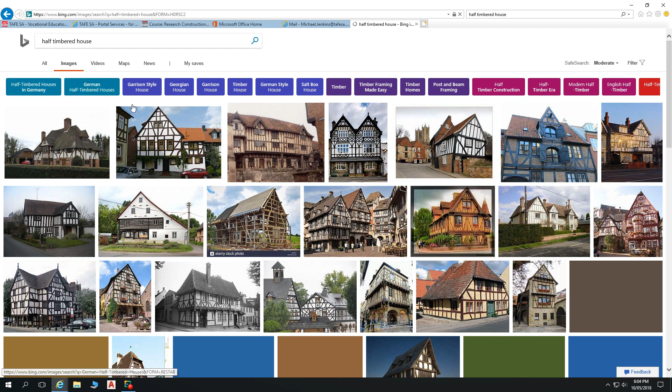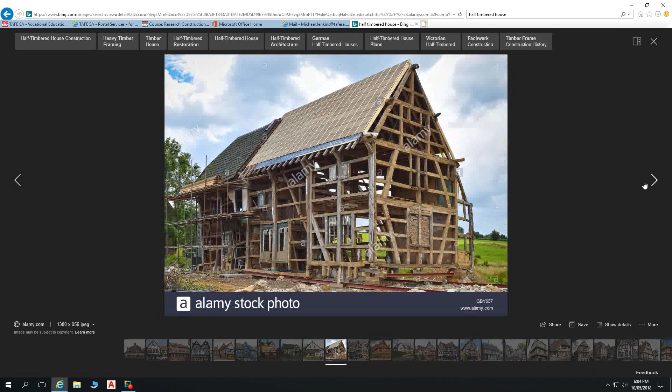I'll do a quick Bing search of an image for a half-timbered house, because I'm sure it's one of those things that when you see it, you go, oh yes, I know those. So it's that classic Bavarian looking. Yeah. Well, actually, that one there sort of shows it all without all the infill. So we actually do have a few of these in South Australia.

So that's sort of the early style of timber building, the first approaches to timber building that truly produce a modern structure. And it's about a series of uprights, a series of cross members, essentially producing portal frames like we went through a few weeks back. If we strip all this out, what we've got here is a portal frame.

What they didn't have back then is steel for making joining plates, or steel for nails. And so to get around that, they used diagonal members for bracing and strutting. So when there's a load on this way, this acts as a strut. When there's a load pushing the other way, it acts as a brace, being diagonal like that. And then some intermediate pieces here for fixing all the brick infill or stone or mud and straw, whatever they want to use. And then all these bits are dowel fixed. You've got mortise and tenon joints and dowels going through all that type of construction. So that's where our building has evolved from in that sense.

I guess you guys would have seen a lot of modern timber frames about the place. We've got upright studs, noggins, top and bottom plate tying it together, and then roofs pitched in, using rafters and under purlins, strutting beams, hanging beams, etc. Where we went on from that traditional way of pitching a roof is to produce a truss.

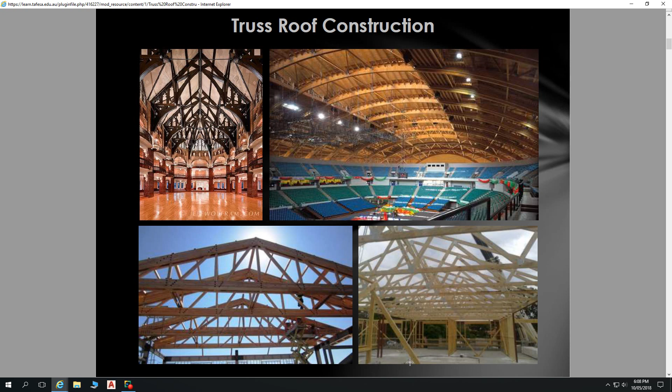So there are limitations with design in that regard, or sometimes it's easier to truss the majority of a roof and then just leave one piece for pitching on site, bits that are a bit odd or funky, that are too difficult to draw up and convey to a truss manufacturer. Although truss manufacturers are getting better at this as well, in terms of you being able to supply them with a roof and all the design information, and then they go ahead and produce trusses.

So a bit of background. Since our first attempt to enclose space for shelter, the most challenging process of building has been carrying the loads over horizontal distances without touching the ground, so spanning between two supports.

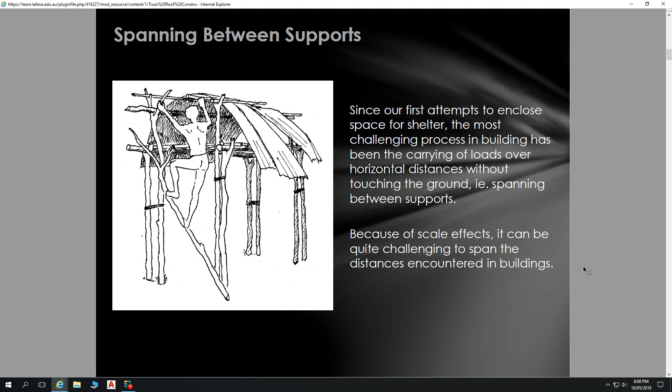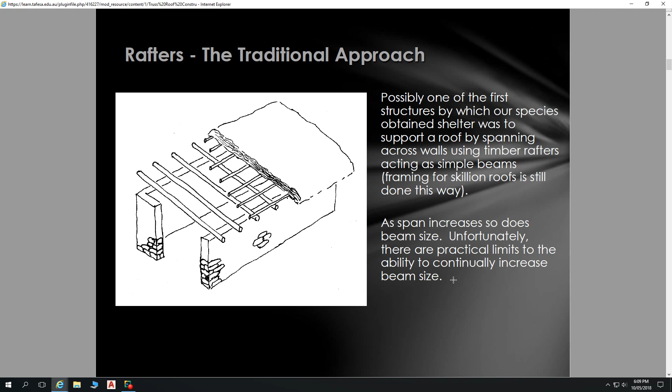So, first sort of approach doing that, simple rafters, skillion roof, and that still has its application. There's still plenty of places that use a skillion roof and long and straight rafters, and that has also, I guess, once again been extended in its possibilities via trusses as well. So not your standard A-frame trusses, but things like ladder trusses and your floor joist type trusses, which we'll have a look at a little bit later on.

So designed to span between external walls, simplifies the roof system and its construction, factory made, available and installed in accordance with AS 4440. So that's an Australian standard you probably will get to know fairly well. One golden rule with AS 4440 is that typically throughout that standard there's 50mm tolerance for things. So you're allowed 50 millimeters tolerance for placing the trusses, 50 millimeters tolerance from vertical, etc. So you notice that 50 millimeters applies through many aspects of installing trusses. Can be designed for most roof shapes, preferred for simple designs, rectangular with gable ends.

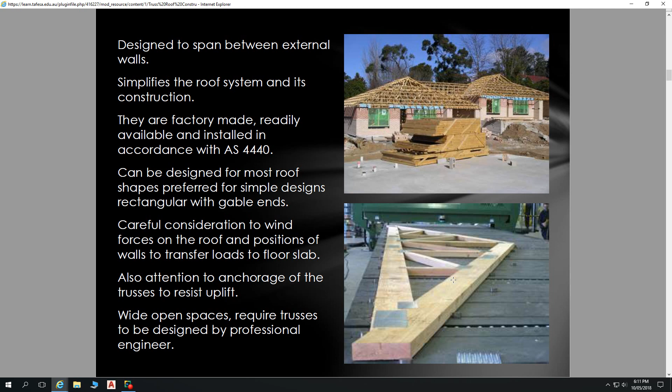So open spaces require trusses to be designed by a professional engineer? Yes. But that's all getting much simpler. So it's about simply providing your roof design to a truss manufacturer and saying, all right, can you manufacture these trusses for me? And by and large, that's getting much cheaper than being able to pitch a roof. So you can get that done very, very cheap. And then, installation on site.

So you save on. Sorry, Michael, I can't bring up that. Oh, yeah, sorry. Is that on here? Or? Yeah, no, it's not. No, sorry. I mentioned before. I gave up looking for it. What's that? I gave up looking for it. Oh, sorry. I quickly mentioned, I'm just grabbing this out of the deployment, and I said I'll have to shunt it in at some other time, put it into this subject because there wasn't many options there. Sorry about that. Yeah, you're gonna have to look on the screen. I'm sorry because that hasn't been

put into this subject, but we're meant to be covering trusses tonight, and floor trusses, and I thought, how can we really go into floor trusses without actually covering roof trusses, to really understand how trusses work and are manufactured, because so many of the elements are the same and the principles are the same. So hopefully I'll be able to drag it into this subject sometime and work that out.

So advantages of trusses: lightweight construction, so don't weigh very much, large clear span underneath. Open web construction for easy installation of services, and that goes for floor trusses as well, as we'll see later. Factory quality control, consistent size and shape, because they're all manufactured within a factory. And here we've got the jig there. From your truss plan, you'll probably have a bunch of trusses at the ends which are all different, particularly if it's a hip roof. But in between your hip through to your other hip, probably going to be like 19 or 20 standard trusses. They're all exactly the same. So they have a jig set up there, and it's about just dropping all the pieces in and pressing the plates in. So they're all going to be exactly the same.

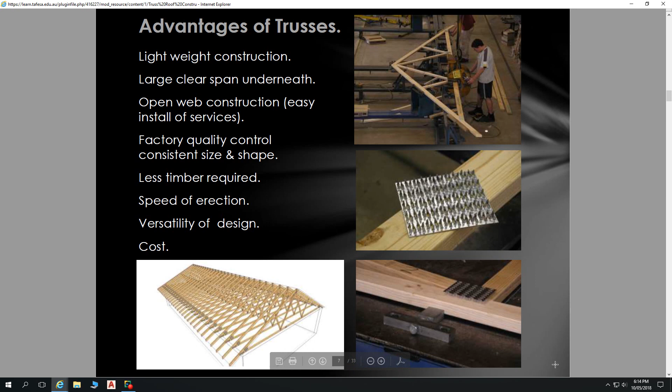So not just timber trusses, but steel trusses, and not just small trusses, but massive trusses. I'd hazard a guess that truss is probably going to be about the biggest truss you're ever going to see, transportable-wise, because you've got limitations on the width of a load that can go on a semi, and also the length of a load that can go on a semi.

I've been told that 15 metres is pretty much your maximum standard transportation on a semi. Maybe that has some overhang on it also. But I'm not sure what you need insofar as police escort for 18 metres. But typically you don't want to go over 15 metres for any of your construction lengths. But then you've also got your widths to worry about. So I guess that sort of truss is not too difficult to transport. If you've got a bunch of them, they can stand up.

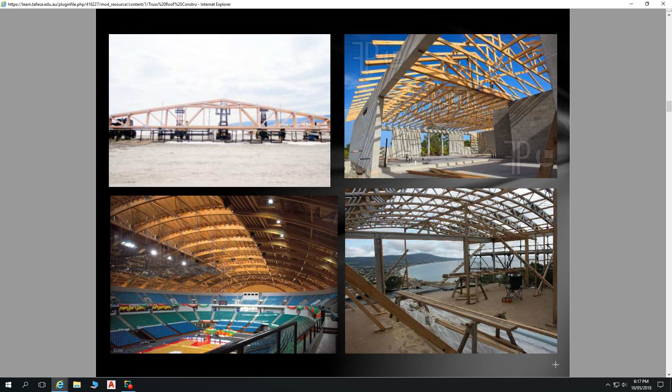but the wall sections are increasingly incorporating trusses as well, moving away from our standard studs and noggins and actually producing lots of tiny little trusses. Trusses for lintels, openings, etc. Actually, I don't know what that truss with the curved top chord is called. Maybe we've got it in here. Yeah, various different types and approaches to trusses.

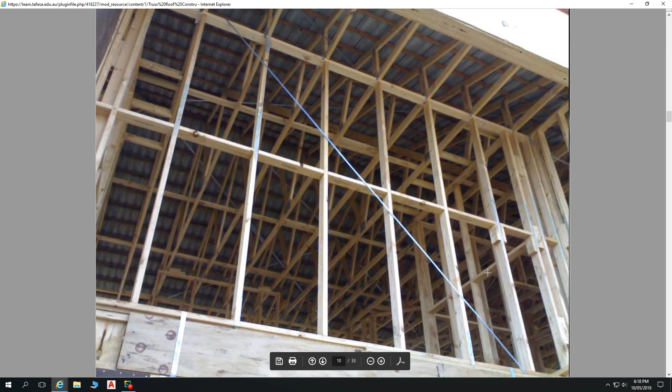So some absolutely massive one. I dare say that was manufactured on site. You've got a bunch of forklifts under that. Composite trusses. So here's trusses manufactured from timber top and bottom chords with steel webbing between, and then you've got fairly standard timber trusses. Once again, fairly standard timber trusses.

Note that these trusses incorporate a vertical strut in the truss where they cantilever. So we've got trusses cantilevering to create an eave. And a sail-over truss to produce a raking eave. So we've got our top chord that extends past the top plate. So this is our top chord here, our bottom chord along the base, and our webs.

Also notice in here, each will be in tension or compression according to the type of truss involved, and also according to the situation, the loads imposed. So at times this will be under tension or under compression, depending on what the wind is doing.

If we've got wind heading from this direction, pushing the load down on that, then that goes into compression, which is forcing this one to bow, which puts this one under tension, which pulls against the top of that. That one ends up being in compression, etc. So you've got these interactions happening within a truss.

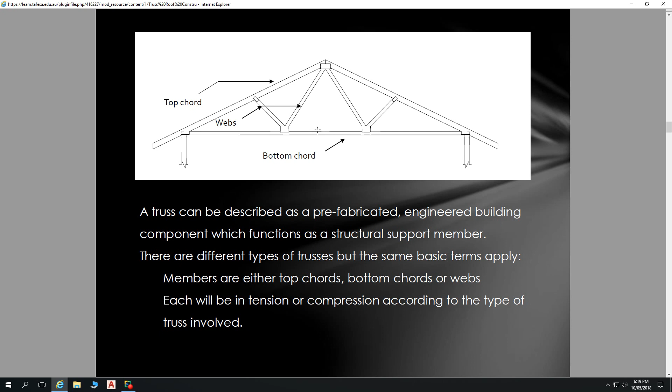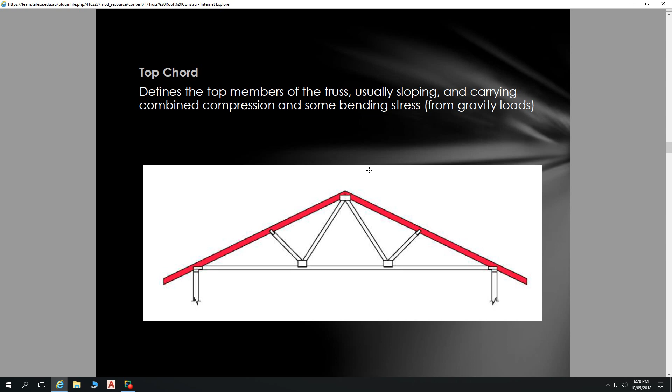So bottom chord defines the bottom member of the truss, usually horizontal and carrying combined tension and some bending stress from gravity loads. Top chord defines the top members of the truss, usually sloping and carrying combined compression and some bending stress from gravity loads. Webs are members joining top and bottom chords to form a truss; there may be tension or compression depending on the truss design.

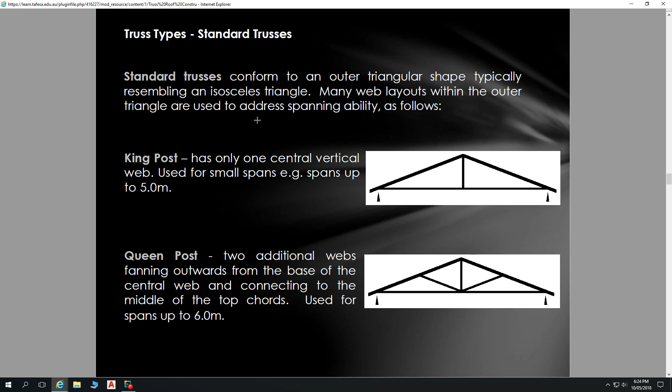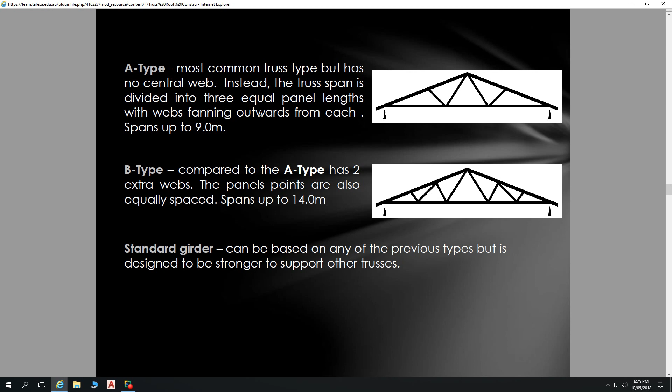So type A truss is the most common truss that you'll see about the place. No central web; instead the truss span is divided into 3 panel lengths with webs fanning outwards from each, and it spans up to 9 metres. And type B has additional webs, and they'll span up to 14 metres. Truncated truss takes the standard shape and cuts the top off.

Now, have either of you seen floor trusses before? Yeah. So we're getting pretty close to that sort of scenario, aren't we, if we chop that off. And you'll see a lot of that shape incorporated in steel frame walling systems now as well.

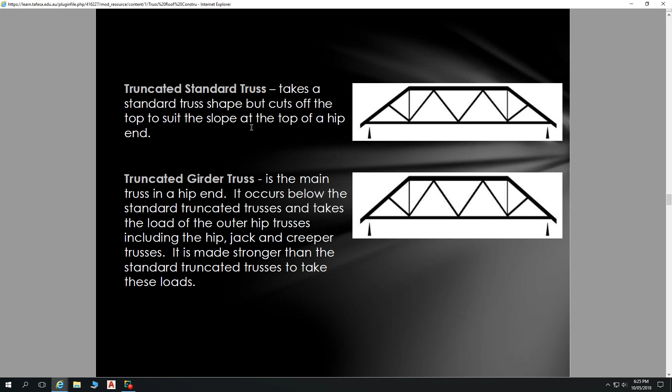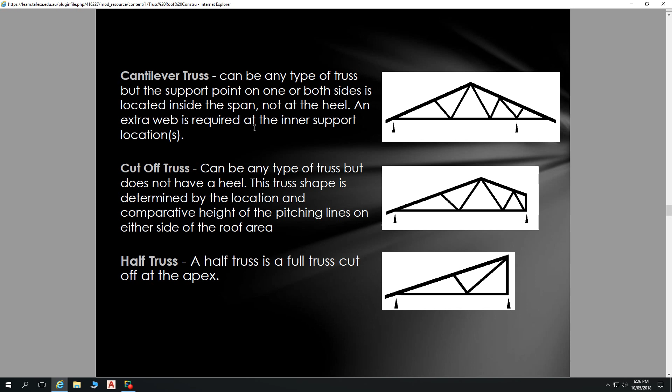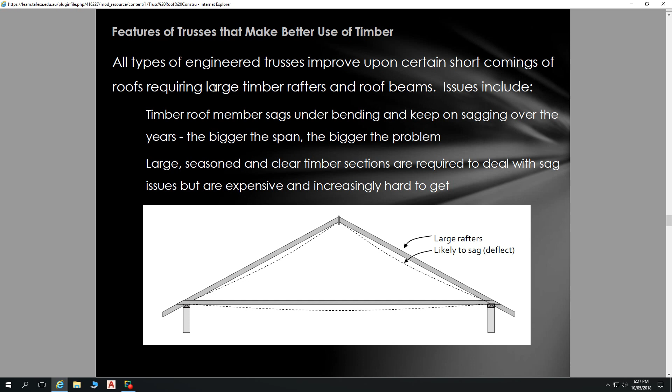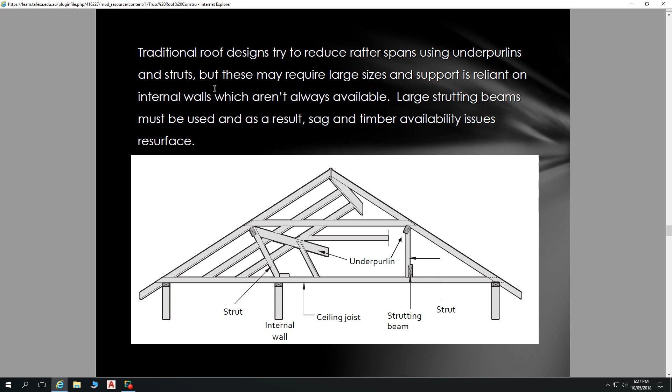So this is basically just rehashing stuff I'm sure you already know. Roof rafters and ceiling joists will sag over time, so it's about producing webs inside there to alleviate that. So this is your standard form of pitching a roof. To counteract a lot of that sag, there are a lot of other members introduced, a fair bit of complexity introduced into the roof, and a lot more design work required. So we covered standard pitching of roofs earlier, so you guys are fairly cool with that.

So trusses help in the following ways. Much lighter timber members can be used. Lighter timber can be predominantly sourced from plantations and easily kiln dried, so there are no surprises as they dry out. Our standard Pinus radiata can be kiln dried in a couple of days, which is much quicker than a lot of your hardwoods, which I think are like 6 weeks or so, and your other species of timber that might be required for other forms of roofs.

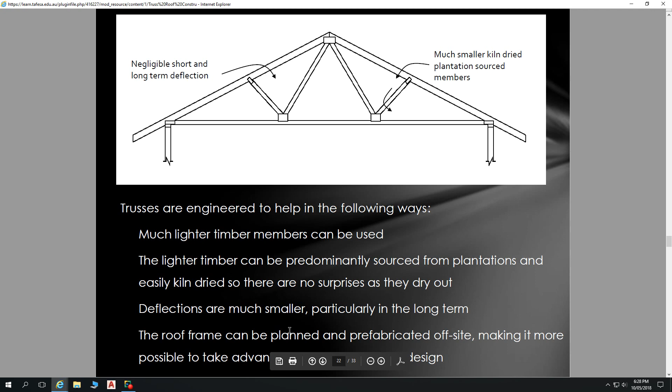Also engineered timber, so laminated veneer lumber, these type of things, is making the possibilities in conventionally pitched roofs much easier as well, because you can get very large, very strong pieces of timber that take very big loads. So a roof frame can be planned and prefabricated off-site, saving time on site.

You can pre-design a camber into a truss, so that when we apply loads, particularly tile roofs, they will settle down to their desired location. There's not such an issue with sheet roofing. Sheet roofing is about 10 kilograms per square metre. Tile roofs are around 90 kilograms per square metre, so we're talking significantly larger loads on a tile roof.

Now, when it comes to ceiling joists, with our tile roofs we have our trusses at 600 centres, so 600 millimetres apart. With sheet roofs, we have our trusses at 1200 millimetres apart. That's just another thing you have to deal with on a sheet roof with trusses: you have to have intermediate ceiling joists, because your bottom chords are at 1200 centres, but your fixing points for your plasterboard are at 600 centres.

So that might require a whole series of steel top hats on the underside of your trusses that you fix your ceiling lining to, or you do intermediate ceiling joists. Those intermediate ceiling joists can be hung with hanging beams on the bottom chord of your trusses, and then join your intermediate ceiling joists in there. So a couple of different ways, but that does have to be addressed.

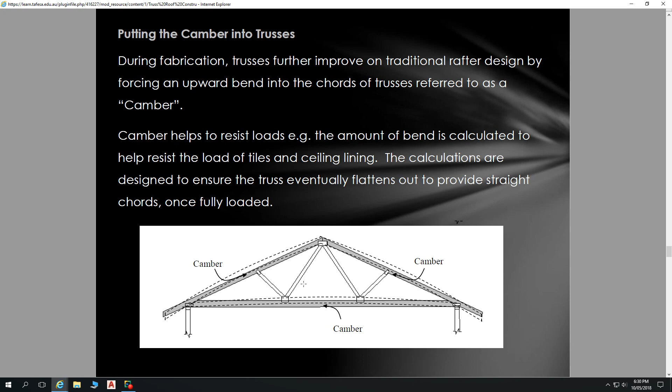So a benefit of trusses is they can span long distances in one go. Internal walls cause problems if used for support because they change the way the truss works. That is an important consideration. Because trusses are designed to be at times in tension or compression, and to deflect and share the force between other members, as soon as we put a load-bearing wall directly under a truss and fix that wall to the truss, that stops the truss sharing the load with its other members.

Then we have an oval-shaped slotted hole there, and you fix it with a nail, but you don't drive that nail completely so it holds it fast in place. You only drive it till it's snug, but there's some movement. So that bottom chord can still move up and down while that L-shaped bracket fixes the wall in place. I'm not sure of the exact clearance you need there, but it's a small amount, 5 to 10 millimetres, something like that.

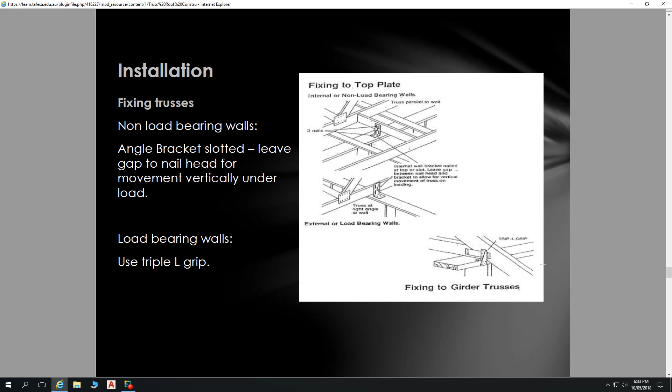Well, that's interesting. Bottom truss bows upward in winter. So possibly as a result of taking in more ambient moisture in the atmosphere, we get expansion of timber. When timber expands, it needs to go somewhere. I assume that's what's causing that scenario. So, there we go. The curved top plate or top chord truss is called a bowstring truss.

So when seeking council approval, or when getting a roof designed by the truss manufacturer, the owner must provide the following information: type of roof covering, pitch of roof, wind category, actual spans, and ceiling lining. When ordering trusses, the following information must be provided: house plan, correct spans, special loads, and special conditions.

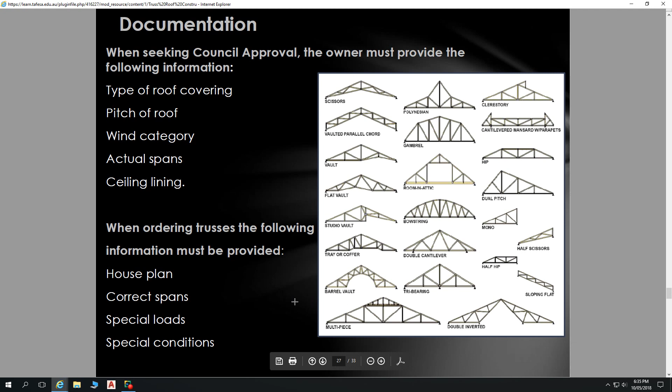Thinking some of those special conditions might be transport, manoeuvrability, construction on-site, any issues surrounding that, like site access, that type of thing. Special loads might be solar systems, roof-mounted hot water systems, air conditioners.

But you end up getting these scenarios where you go, okay, that's what our roof is going to be doing, and then you go, right, well, in this bit here, we'll have some standard trusses heading along there, but then we get to this bit where we've got standard trusses underneath that already. What we'll have to create that little section of roof are what are called saddle trusses.

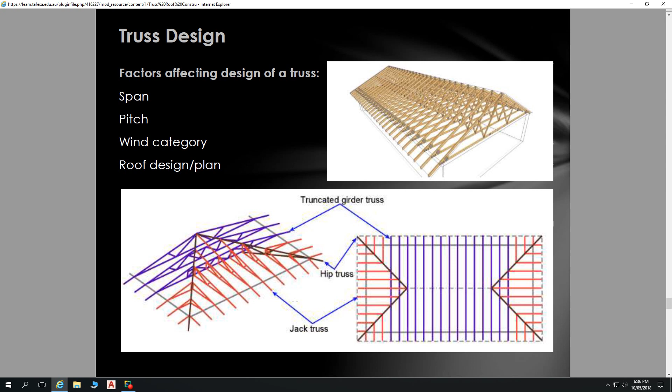So, the thing I wanted to illustrate is it's fairly simple when you've got a square plan. When you start getting other sections on there, then there's all these tiny little trusses that start getting involved in that. So, like that, for example.

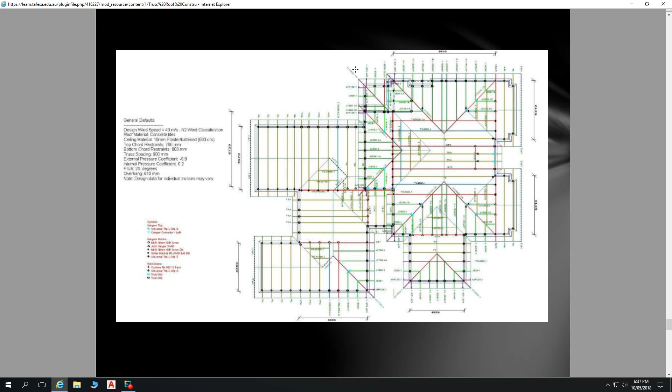How clear is that? It's not. It's not really clear what we've got happening on there. Yeah. It's not a great example because we can't read any of the specification of our various types of trusses on that.

So, yeah, this one, there's not too many weird things going on. So a lot of standard trusses through here. We have a truncated cut-off girder truss happening in that scenario, which links up to this other girder truss in there, which is picking up a lot of this load, and we've got a hip truss in there to create that. Some creeper trusses coming up to that, some cut-off trusses onto this side. So there's some interesting things happening in that corner there to create that corner.

But beyond that, there's just a lot of standard trusses. I'll have some half trusses here because we've got basically a half roof through that section there. And a very interesting girder truss happening in this scenario here. The rest of that's a fairly standard combination of hip ends. So, hip trusses, creeper trusses, jack trusses, and standard trusses.

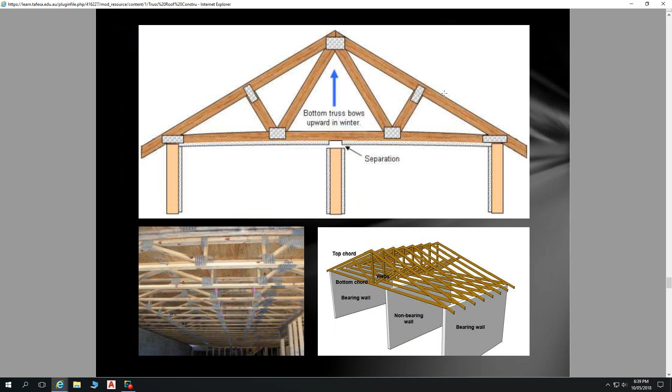So actually, I'll quickly flick back to our hip end there as well, just to remind about those types of trusses, because that will cover essentially the vast majority of trusses you encounter. The only thing that doesn't cover are what are called, I used the term just before, saddle trusses, sorry. So, saddle trusses, and I'll try to draw it up larger.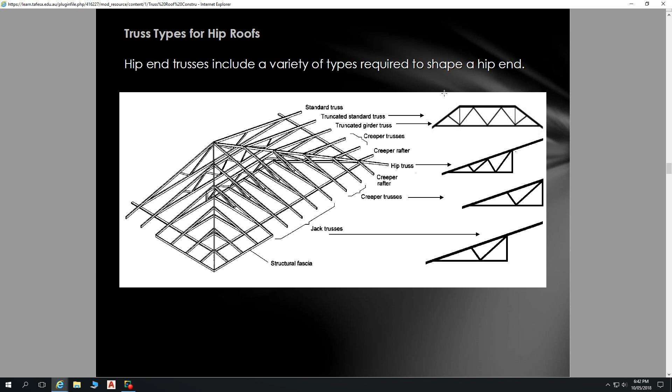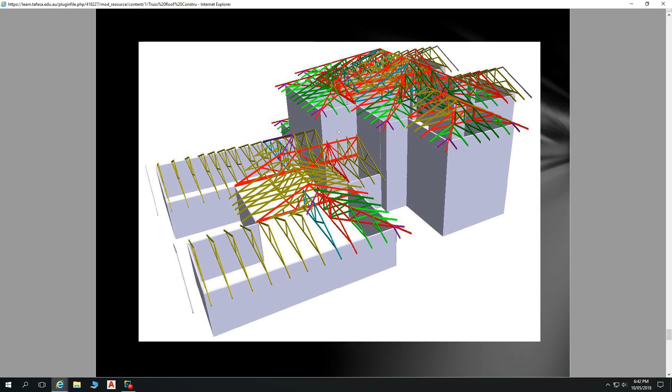So beyond those trusses that you see required there to create a hip end, or between those and your saddle trusses, you're pretty much covering 90% of the trusses you'll ever see used in a roof. Beyond that, like we've seen in this model here, we've got a couple other funky looking trusses happening in there that are sort of case specific. Things like this fella here, a truncated girder truss that's cut off, that sort of thing.

You could probably, if you wanted to go, say, 15 metres and then another 15 metres, if you had a beam designed to support the middle, yes, have two half trusses. Possibly. That'd be a question for the truss manufacturer to see if you can do a half truss that'll span 15 metres. Typically your A type truss, you can extend them out to be that size. Whether you can do that with a triangular half truss or not, that'd be a question for a truss manufacturer. But certainly for making transport possible, that might be the way to go. Although that's a roof spanning 30 metres width, so an open floor area of 30 metres is a pretty big roof area as well.

What we use for doing the roofs on our steel tanks, they're still only 13 metre long trusses, but we do them in two sections with flat plates and bolt them together in the middle, so they get transported as two halves bolted together on site before being lifted up. So it's another way of doing that as well, to produce two halves like you say. And how big are they when they're together? When they're together, that's spanning 13 metres, so it's still not huge.

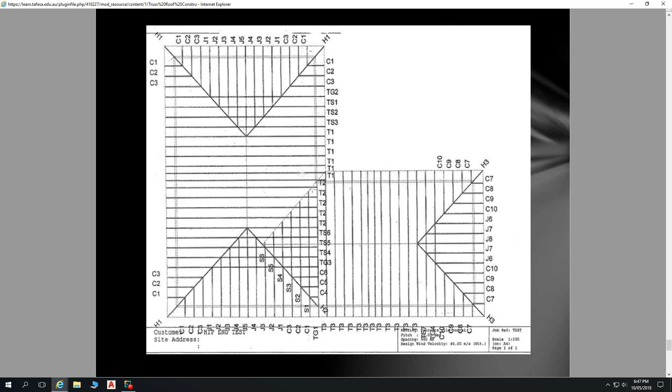So that one, that's actually been grabbed from diploma, as I mentioned earlier on. I'll just get out of that. Open up.

So, a couple of major truss manufacturers. You've got Pryda, who produce trusses, and they produce a whole series of metal fixings and metal products for building, so lintels and things like that. And you've also got MiTek. So you've got various different truss manufacturers in Adelaide, but they're either using Pryda products or MiTek products.

Right. So have a look at the Pryda stuff first. So Pryda floor and rafter trusses. Our floor trusses, that's the trusses we use to create flooring, and rafter trusses, that's what we were talking about just before, so that's all our roofing. So timber for these trusses is on flat, provides a stable platform during installation and minimises the overall depth required. All trusses are commonly available timber, and most floor trusses in Australia are made from 70mm or 90mm dry timber.

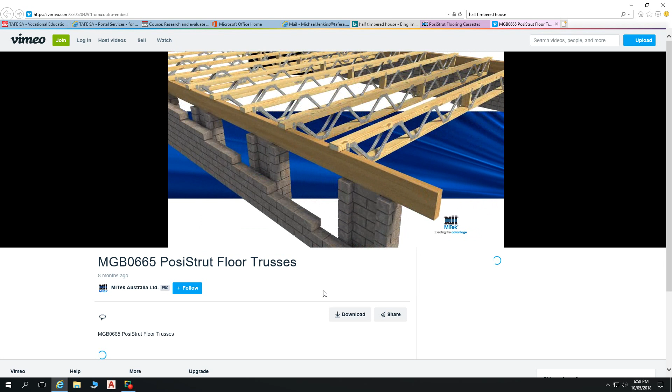Welcome to another MiTek building product innovation. MiTek PosiStrut Floor Trusses. MiTek PosiStrut Floor Trusses are open-webbed parallel chord trusses that are ideal for a variety of flooring applications. When used with MiTek's unique load-sharing strongback bracing system, PosiStrut floor joists deliver a rigid floor structure that's straight and uniform. PosiStrut floor trusses can also be designed for top chord support, which makes them quick and easy to install, and ideal for internal applications where space is at a premium. Costs are also reduced, as there's no need for expensive hangers or brackets. Plus, these wide parallel chords enable the truss to be placed upright where required without the need for temporary bracing.

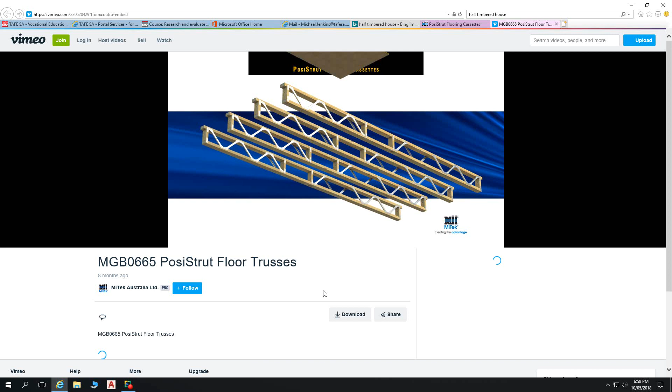As MiTek PosiStrut trusses are an engineered product, they can be manufactured to length so they're ready for immediate installation on site, eliminating the need for trimming. For even quicker on-site construction, there are MiTek's PosiStrut floor cassettes, a prefabricated floor which has been manufactured off-site to all the relevant specifications. Allowances for deflections, reactions, plumbing locations, void stacks, wastes and ducting.

So there was the. Shall we just go back?

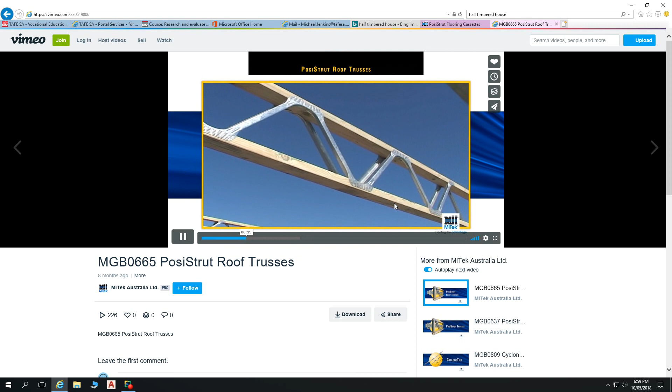Welcome to another MiTek building product innovation. MiTek PosiStrut Roof Trusses. MiTek PosiStrut Roof Trusses are engineered open-web parallel chord trusses that are ideal for a variety of roofing applications. They can be designed to suit almost any roof application, with clear spans up to 8 metres. This allows architects and designers a greater degree of flexibility and the opportunity to introduce some exciting dynamics into their

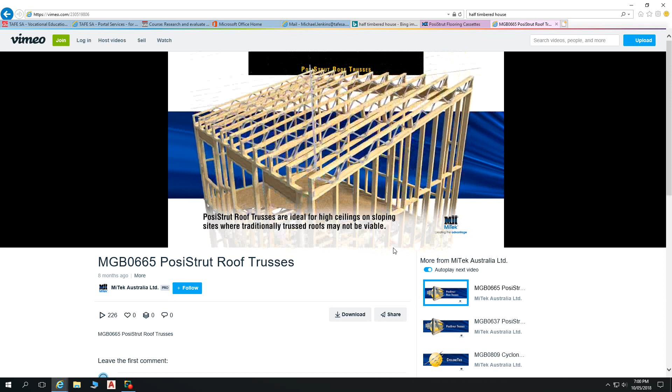designs. Low-pitched flat roofs have increased in popularity as owners seek the appeal of high ceilings but are often hampered by building height restrictions. Height limitations can also be an issue with two-storey homes where sloping sites make traditionally trussed roofs not viable. Even cathedral ceilings can be easily accommodated with MiTek PosiStruts. MiTek's PosiStrut trusses are easier to fix, easier to manoeuvre, and easier for following trades.

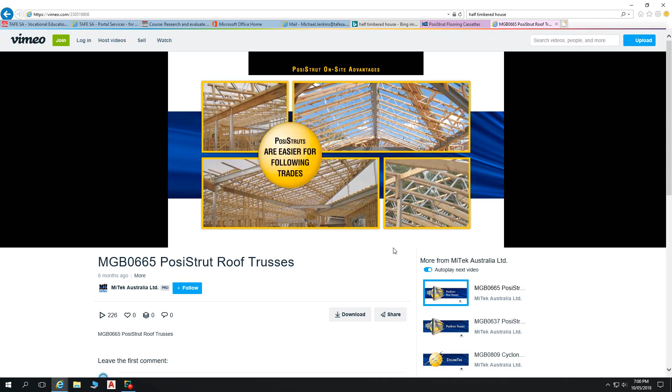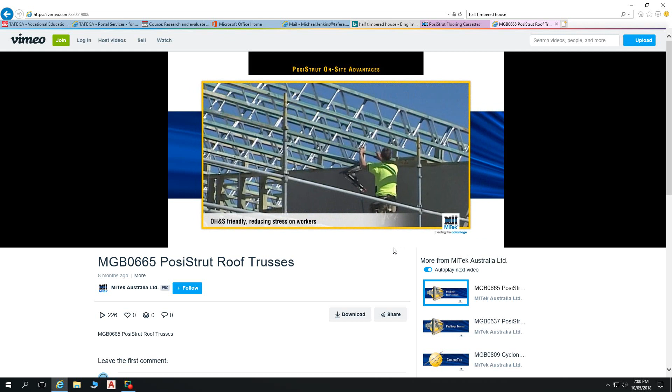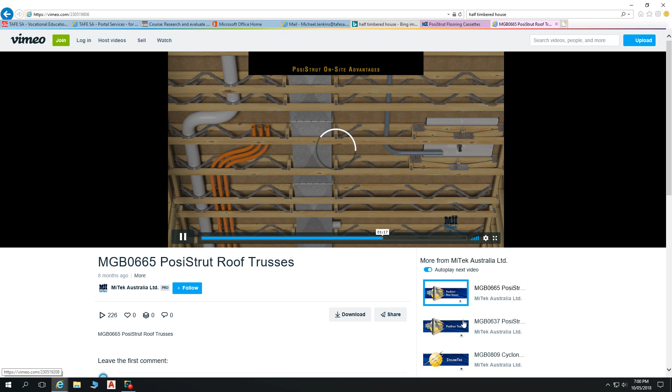Their open-web design makes them much lighter than solid timber beams. Lighter weight design invariably leads to safer handling and faster installation times. PosiStruts provide ready access for plumbing, electrical, even air conditioning duct. Welcome to another MiTek building product innovation. MiTek's PosiStrut, one of MiTek's most innovative.

Alright, we'll leave it at that then. Back into this one. I'm not sure where the link is within here because I found it through a Google search. But basically, prior to doing those flooring cassettes as well, I just wanted to show you that they're doing exactly the same. So here we go. No, we don't. What's the link? Oh yes, it is just really slow to open.